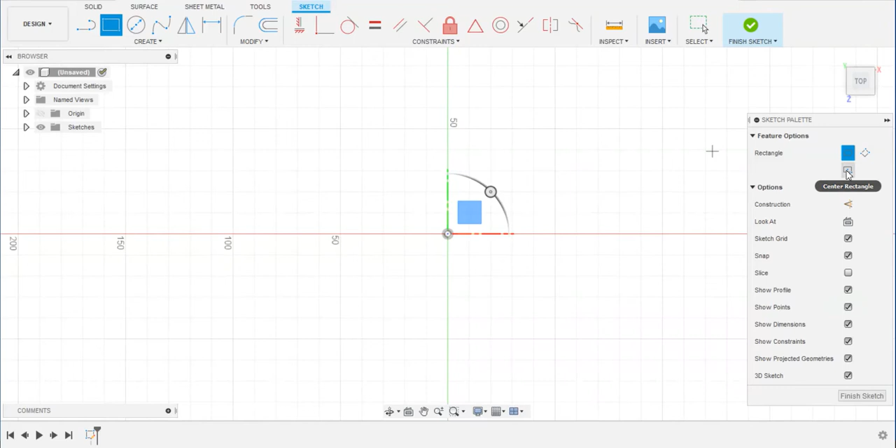As you have seen in the thumbnail, I am going to create a small bottle of glass material. For that, I am going to create a sketch of a rectangle. By selecting this center rectangle, I'm going to create a 100 into 100 square, and using this extrude command, I'm going to extrude it to 100 so that I can get a proper cube.

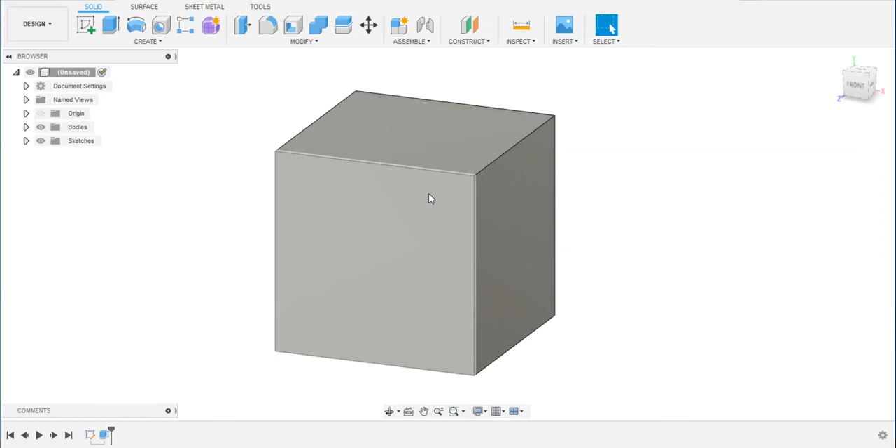And I'm going to create another cube using this free form so that I can remove the inner part and create the bottle. So for that I'm going to use this free form to create this box at the bottom part.

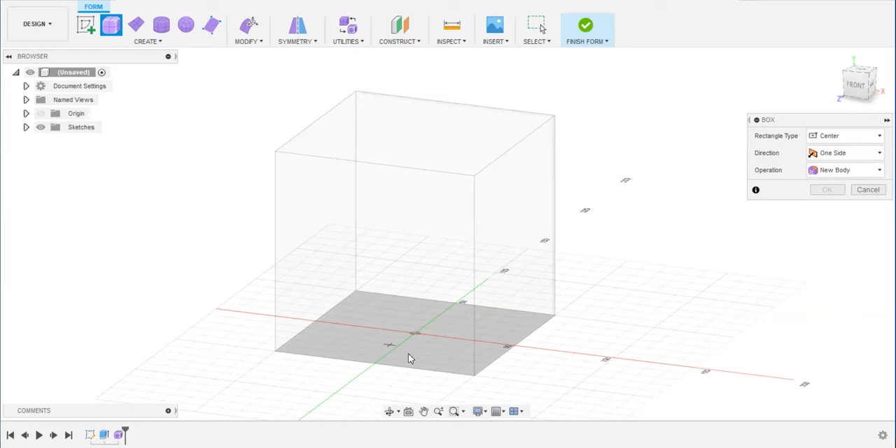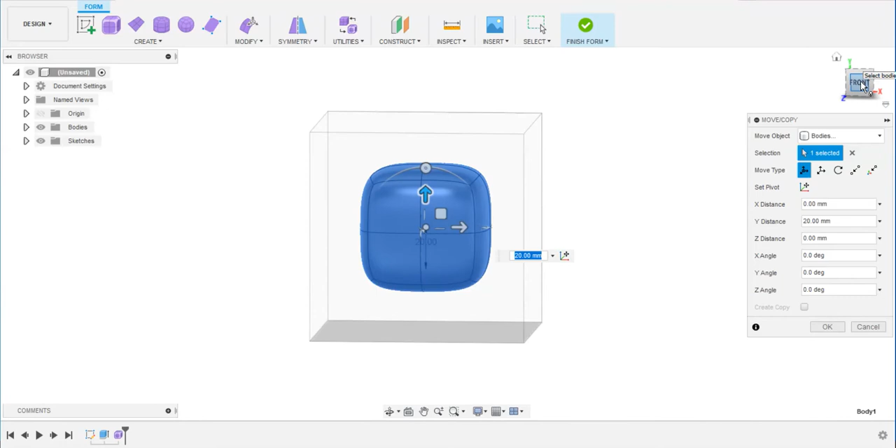Click on the bottom plane and create a box like this and make it a square like this. Click OK, and pressing left click 2 times on this box, use right click and click on move so that I can make it as a center.

After creating this, I'm going to create a spline between this inner part so that I can cut the inner part, but before this I'm going to apply material onto the cube so that I can make it a transparent material.

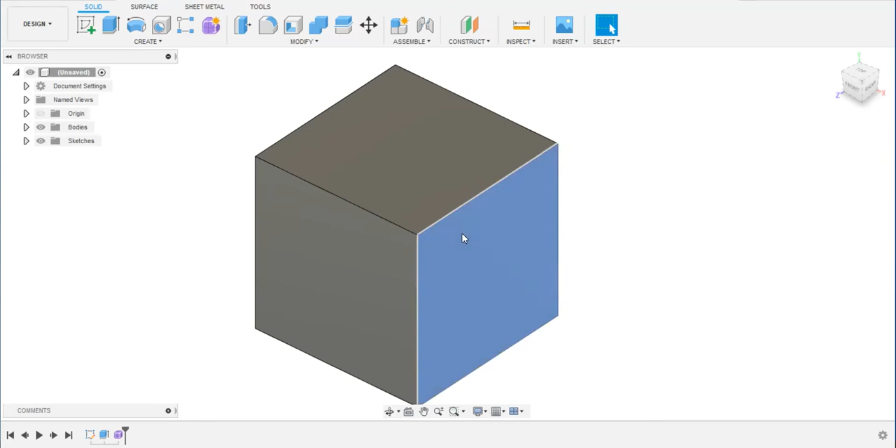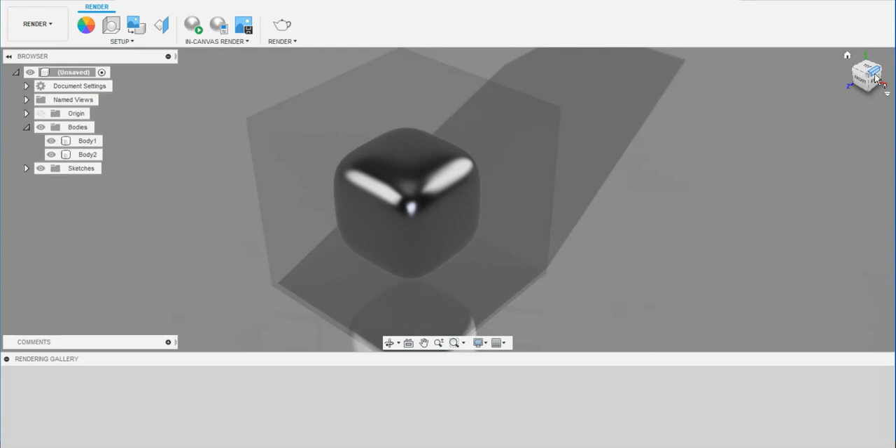Going to the body, here in the body I have two bodies, one is inner part, one is outer part. By clicking on this body, click right button and choose physical material. After using this physical material, I'm going to apply glass on this. You can also see in the render panel we have applied glass on this cube.

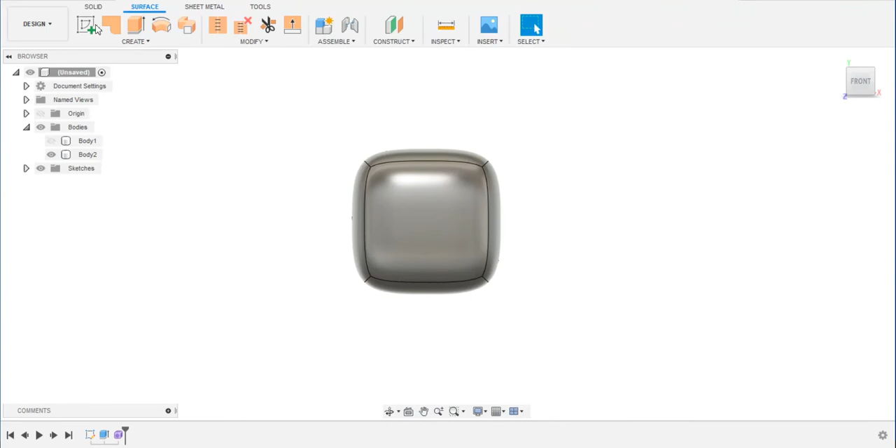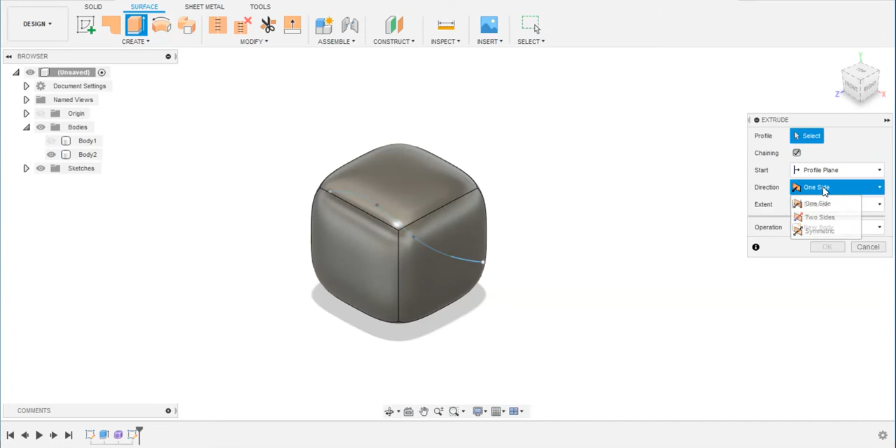So come into the design again, and we have to cut this inner body. First I have to disable the outer body. Click here, go to surface, click on sketch, use this center and use the spline like this, and use this extrude command for the patch for this surface modeling here. Select this profile, click on symmetric, and use this to extrude it.

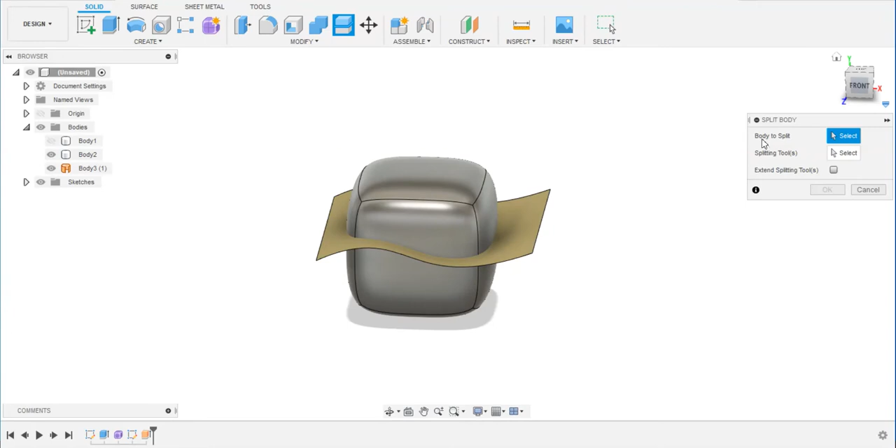Going to the solid again, I'm going to split body, using this as a split tool. Click to this split body. Body to split means I'm going to split this body, and as a splitting tool I'm going to use this split tool to split this body. Click OK, and now I get this body 2, and this is my body 3.

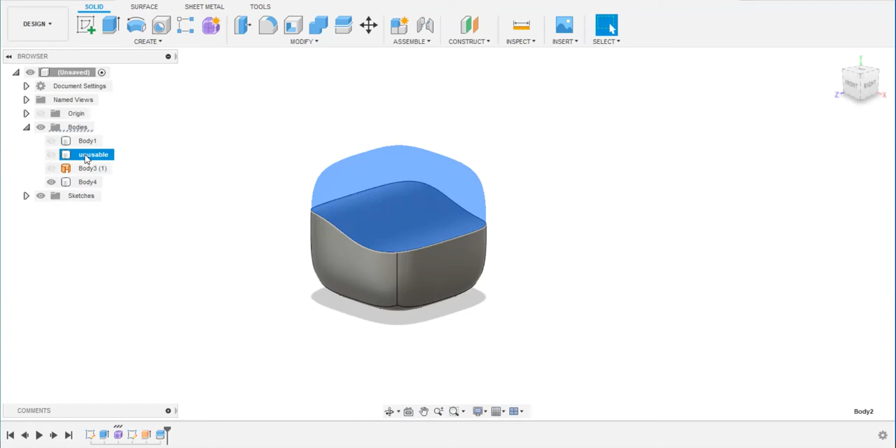So body 2 is unusable, and also body 3 is unusable. Okay, so we are going to work only with body 1 and body 4.

Also you can see by using this section analysis, by selecting any plane where you want to section, see the inner part of the body. This is used to create components or bodies inside the component or body.

For example, if I want to create the bottle for this water here, I am going to use this. First cancel it and name this body as box, and name this body as water.

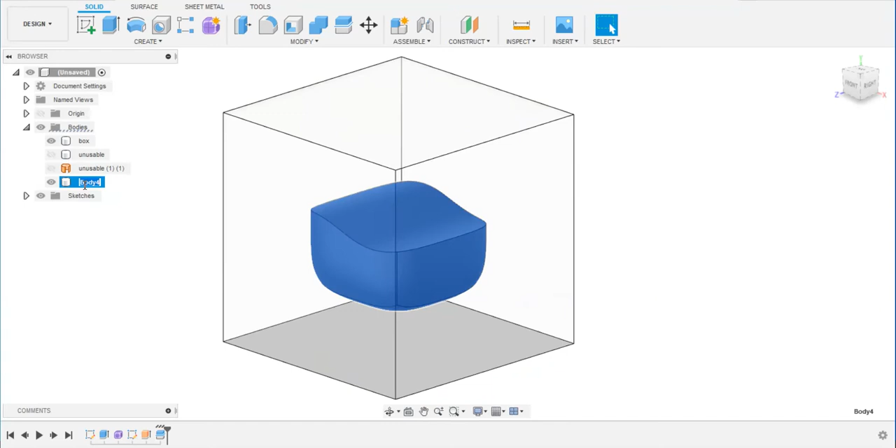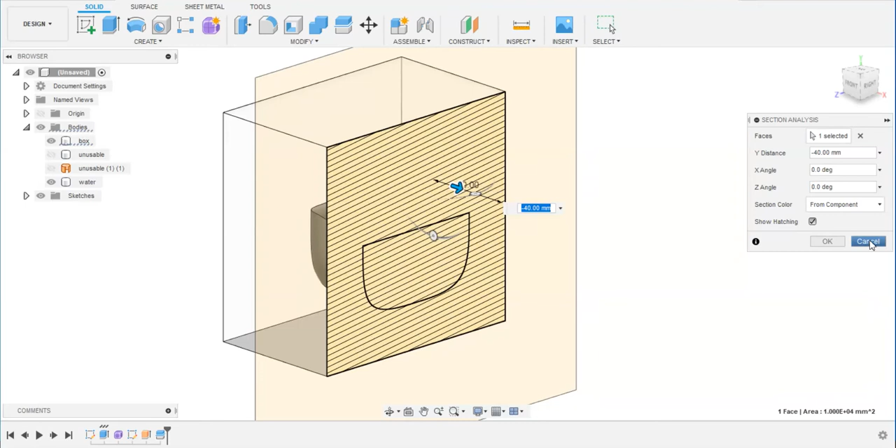Okay, now if I use this section analysis again, I can see this is my inner body. But the thing is, we haven't removed the inner area of this, so I'm going to use this unused, both this water and this unusable body, to remove some part of the cube from the inner area.

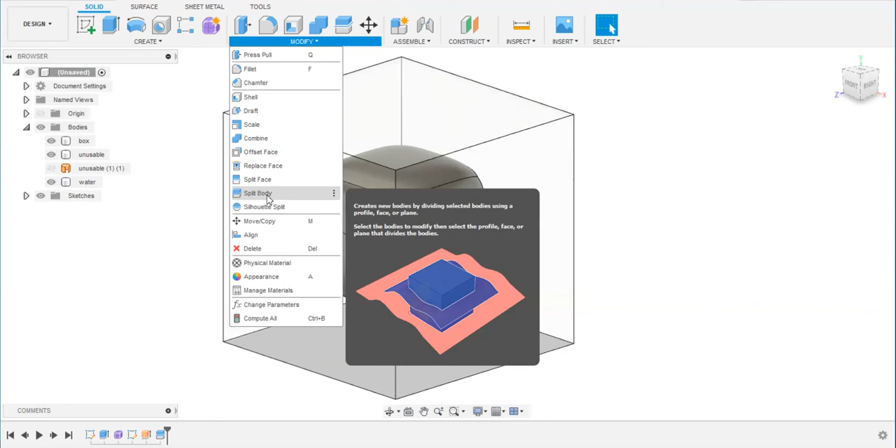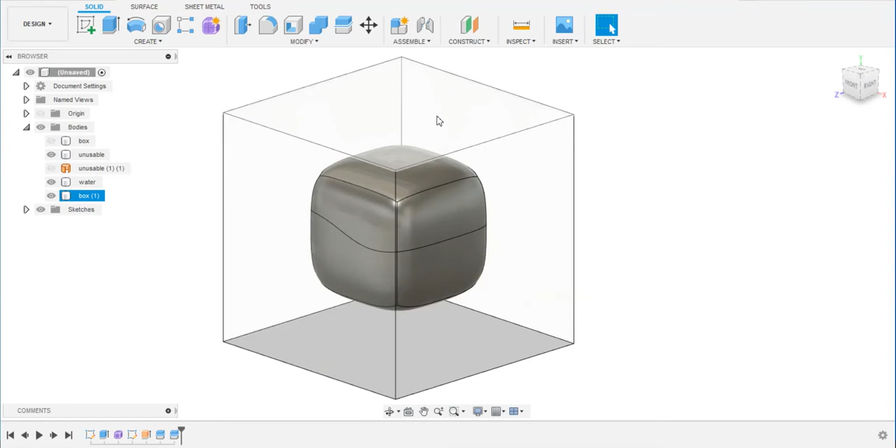So to split body, I'm going to use this body to split, and I'm going to use this as a split tool. Click OK, and you can see now this is the water, it is at the bottom, and this is the box, and this is also a box which we don't want. So this is how we can use this.

Now we can go to the section analysis again. If I see there is some hole, and this is our water. I can make more videos on this topic.

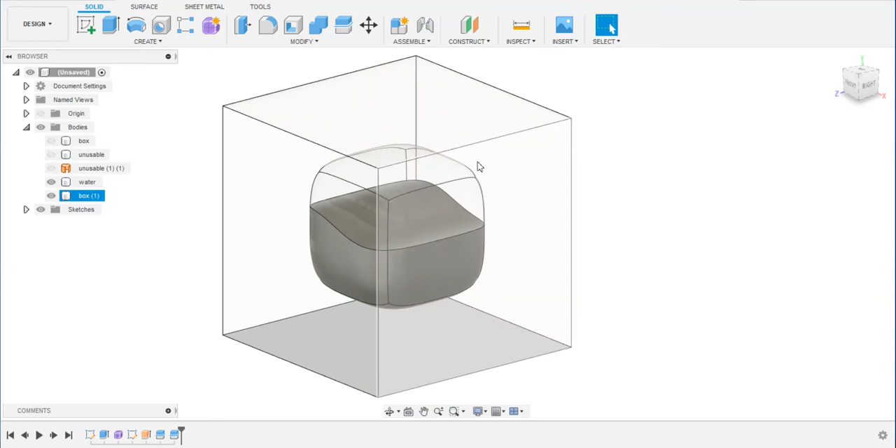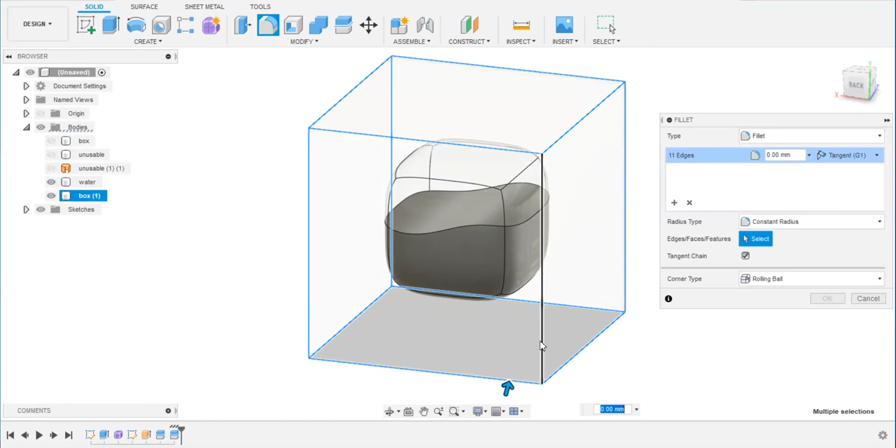But now I'm going to create this as a perfect bottle. So I'm going to select each and every edge of this cube so that I can create a fillet command. Using this, I'm going to use the fillet command over this.

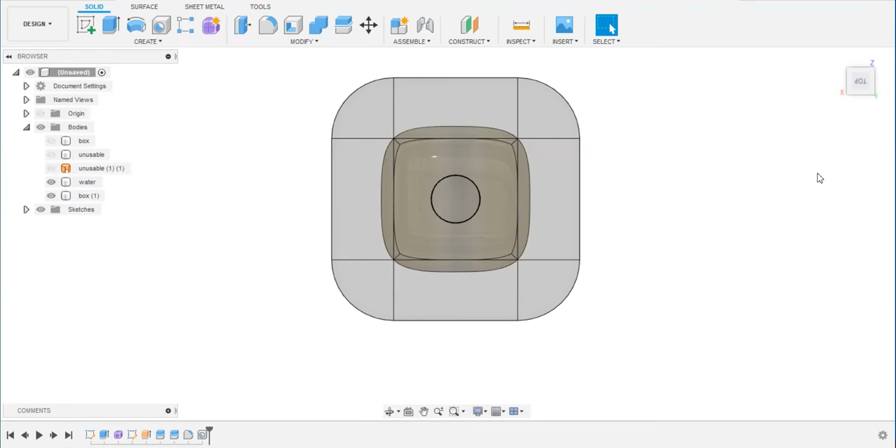Okay, done with this. Now I'm going to create a hole over this surface. This is at the bottom, which is good for us. If you want to make it anywhere on the face, you can drag it, and we have created a hole.

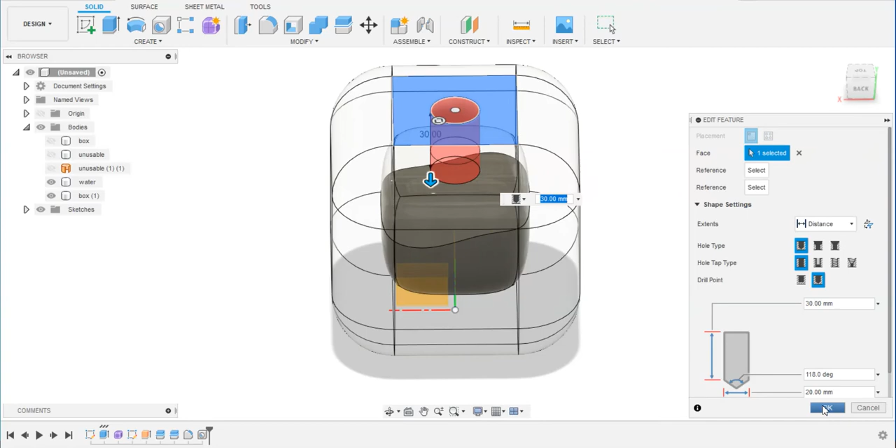But we need to extrude this hole more, because this hole is touching the inner area before reaching the bottom. So we are going to edit the feature and drag it down to get it larger.

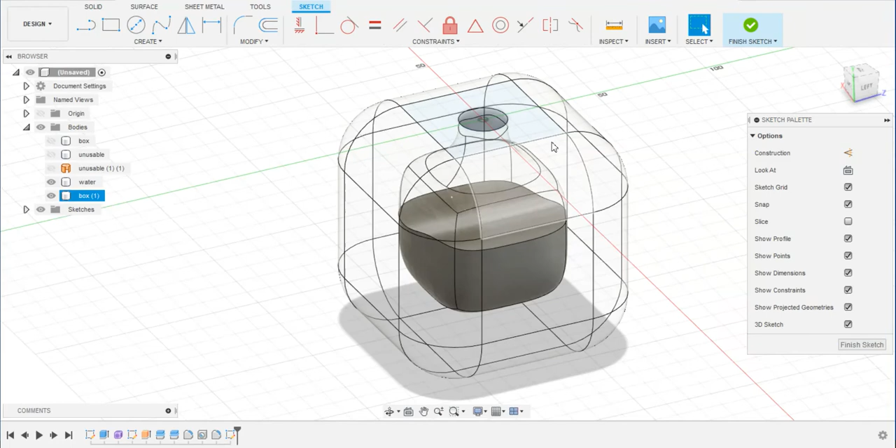Now use this fillet at the inside of this, so that we can get more smoothness. And also we are going to create a sketch over this, so that we can create a body over this.

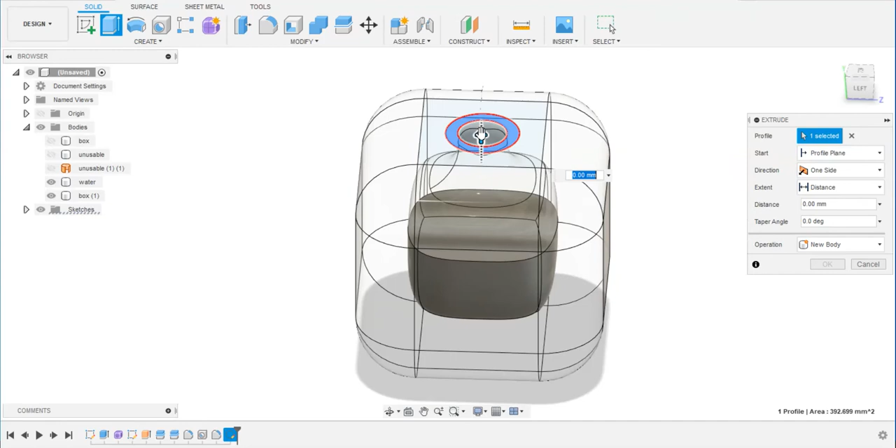Like for example, if you want to create a cap on this, we can create a cap. I'm going to use it as 30. Click OK, and use this extrude command to extrude it a little bit like this. I'm going to extrude it to 20 only, and using this thread, I can make thread over it.

But I don't want to make thread over this, because I'm going to create only a simple cap over this. So this is how we can create it till now.

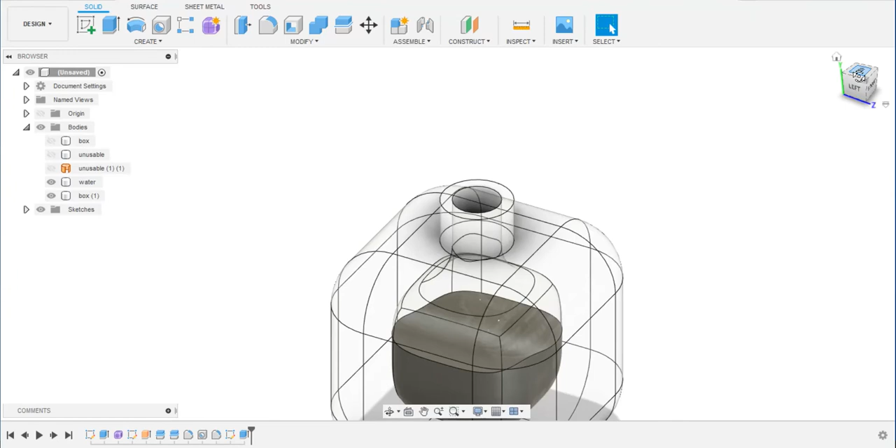And in this, I'm going to create a cap. So for that, I'm going to select this upper area and use this sketch command again to create a cap on this.

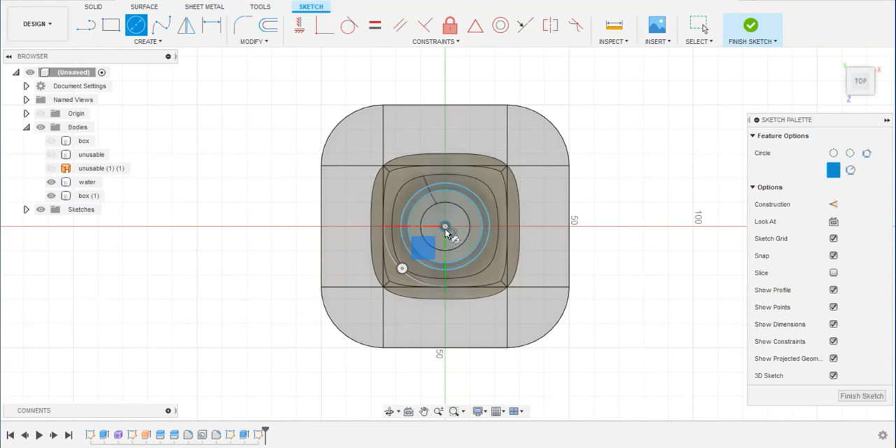I'm going to create a cap from here to here, here, and also here. Click OK.

Use this extrude command for the outer area, for the two sides, because we also want this area a little bit up, but not like this. I'm going to create it as a 4. Yes, that is correct. Going to create a new body.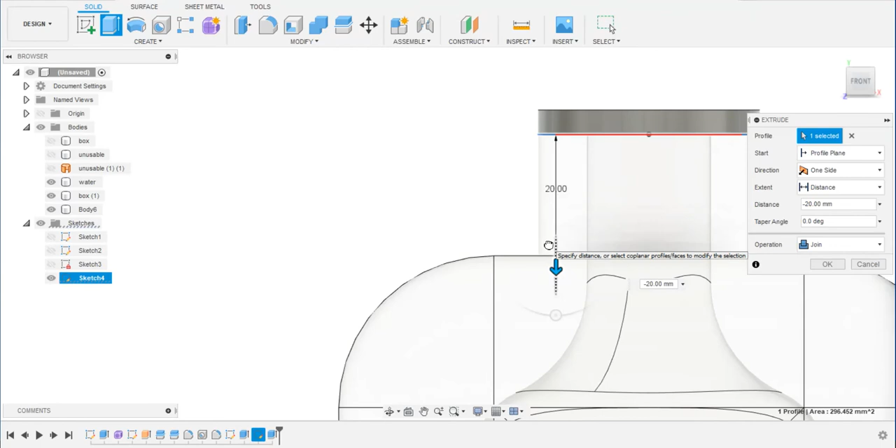This is not working. Going to select one surface again, use this till here, but I don't want to make this. I want this to here, and use this to join to this body, and I want this box hidden for this time right now.

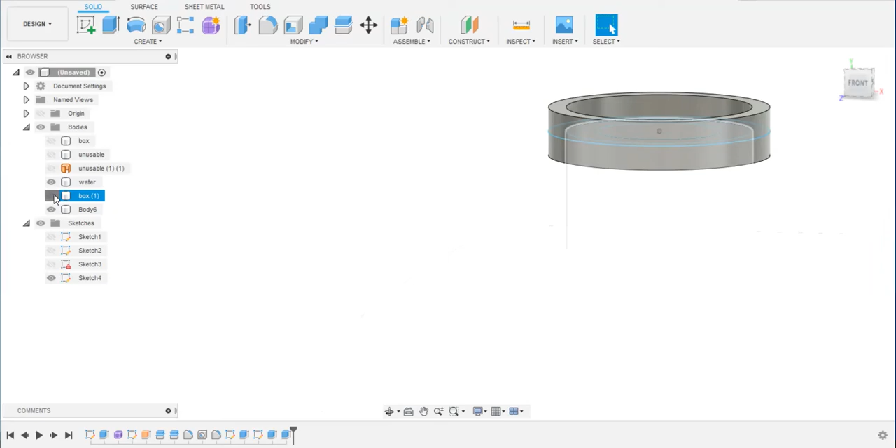Click OK. Make this box shown to us, and again use this part and this part extrudable.

Like this. Make this box hidden for some time, and we have created this.

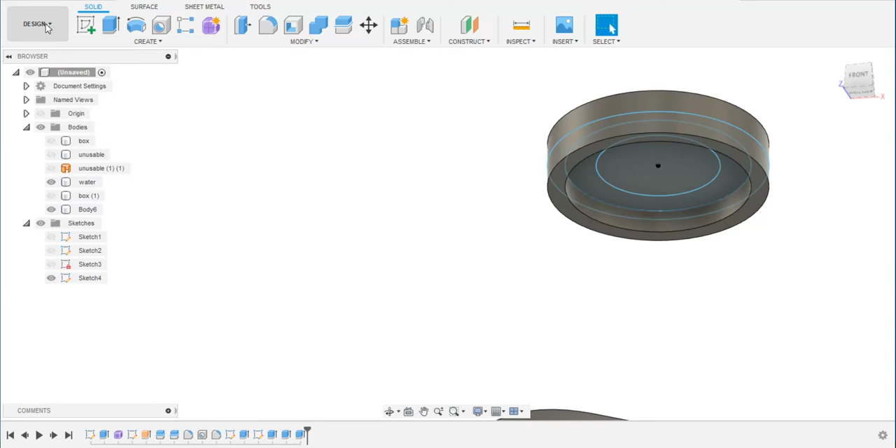And now I need to create a cap, the inner part of the cap. So I'm going to make it like this. I can see it by using this.

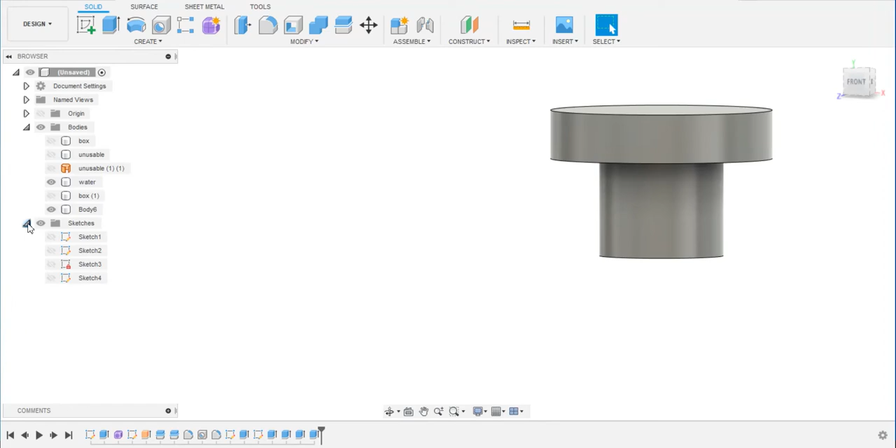Good, well, we have done with this. Click on join, and using this sketch, we can hide our sketch, and using this fillet command we are going to fillet it down a little bit, like this, which is looking good. And also we are going to make a fillet in this.

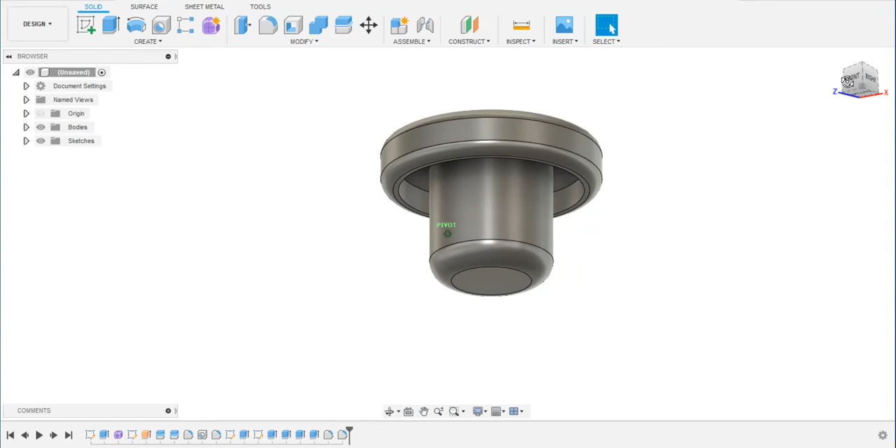Okay, now we are going to apply material on this. So this is our body, which is to be renamed as cap, and in this I'm going to apply a physical material which should be wood.

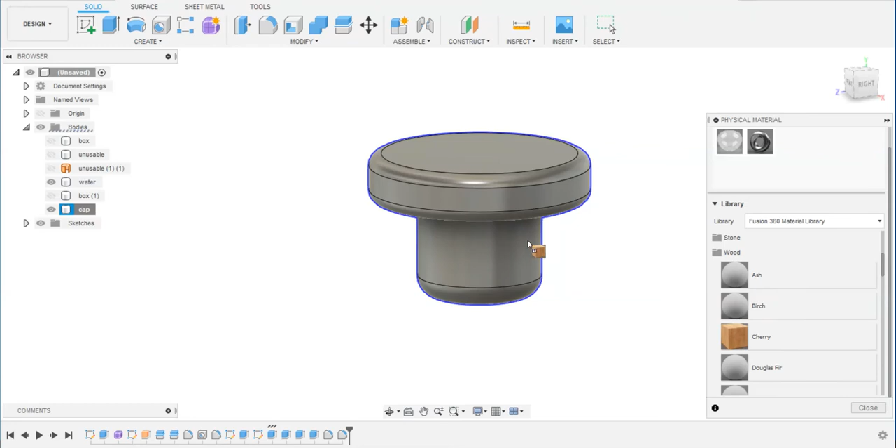Wood means this. Okay, now close and make this box open, and I'm going to apply a physical material also onto the water. So use this physical material again, and apply water to the physical material.

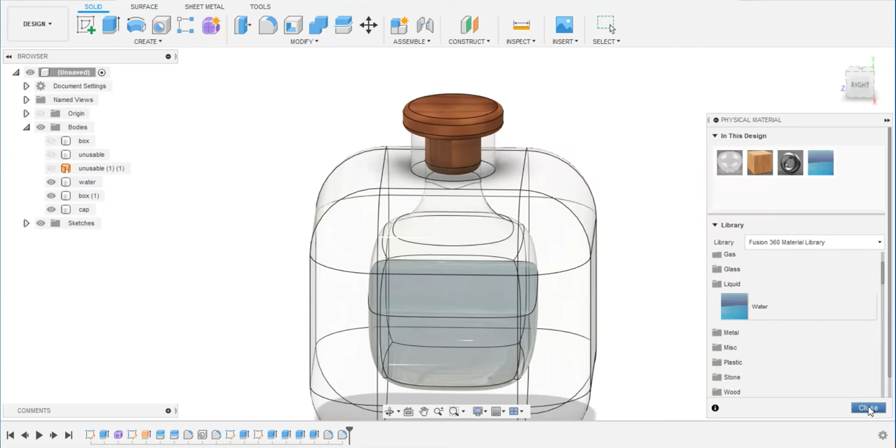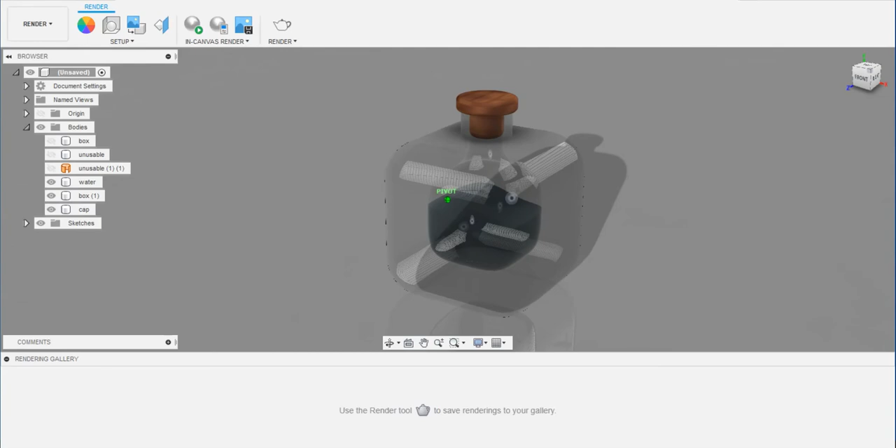Okay, close. Now if I go to the render panel, I can see my bottle clear with the water. This is how we can create a bottle inside Fusion 360.

I hope you have cleared your doubts with some features inside Fusion 360. In the next video I'm going to make bubbles inside this water.

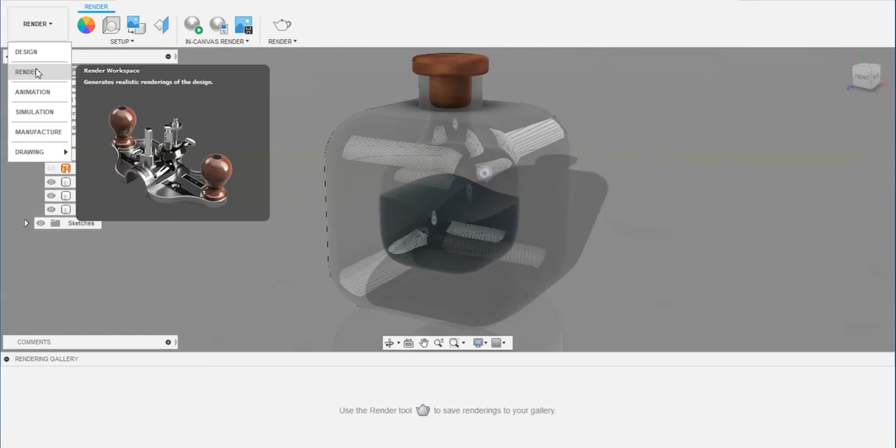For this I'm going to render. We need to save it first, and after that we can render only. So I'm going to save it as glass bottle.

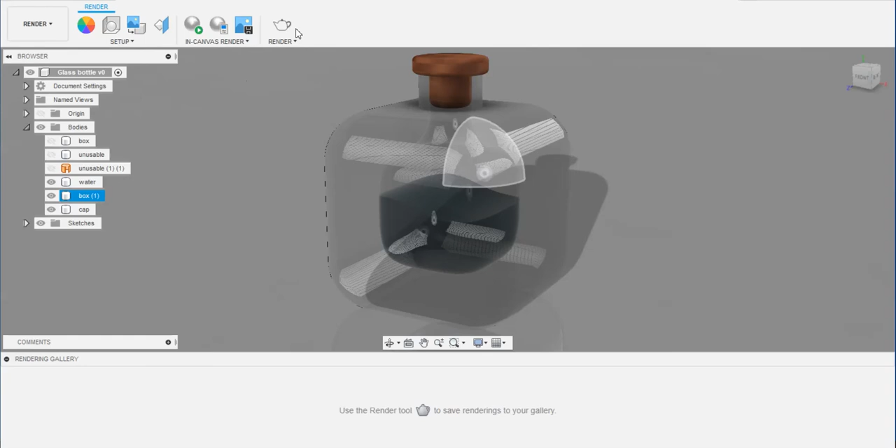Okay, it is saved. If I click on render, I have to go to custom, and using this custom I am going to use 1920x1080. You can also use this student education license from Autodesk Fusion 360, given for free for 3 years, and there is final, and click on render.

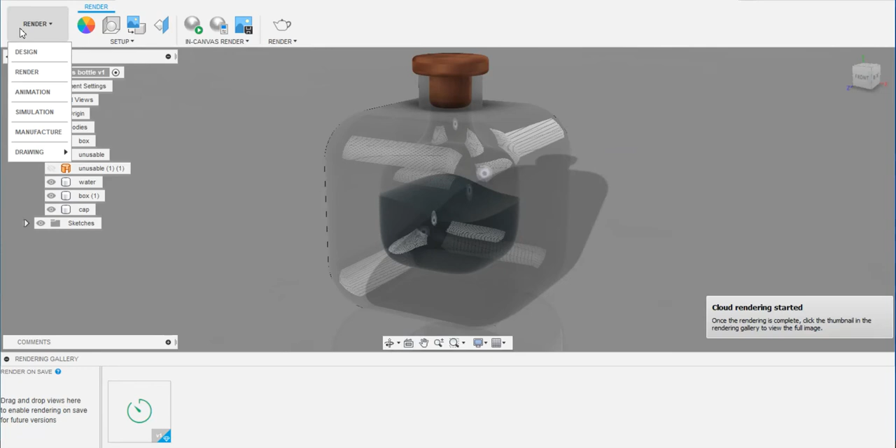Rendering is started, and I'm going to click on design again. Now you can see this part is movable because this is a cap, and all these separate bodies are movable.

You can use this by pressing left click 2 times onto any part, or use the right button to use move and copy. By clicking onto this, you can move your sketch anywhere in the scene.

So rendering is going on. After rendering is finished, I will resume it.

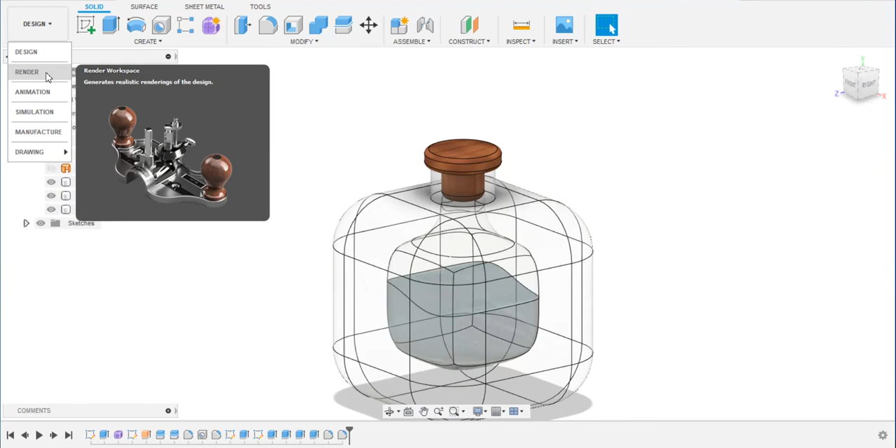So my rendering is finished, and you can see here - if you render anything into the scene, your rendering will be stored here, and this is my rendered image. You can see that it is very clear.

And you can also use exposure to make some changes inside this, and this is looking perfect for the scene. But it is still not looking good for me, because of some error in the rendering.

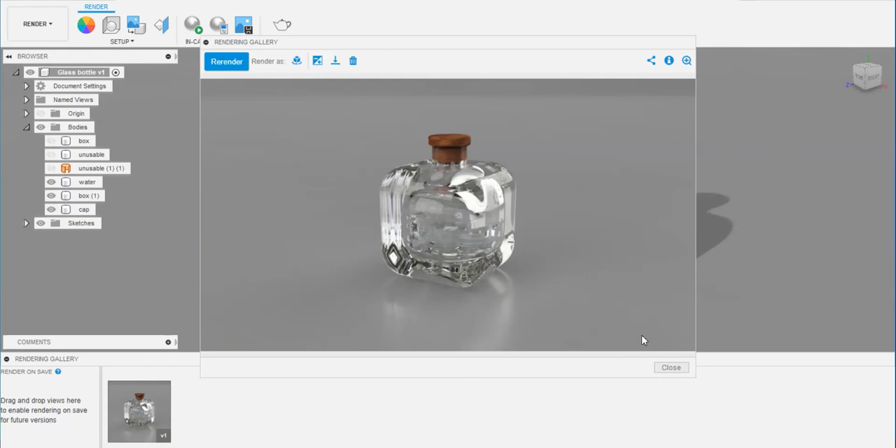And you can try from your own, so that you can get a clear render. In this you can see I cannot see the clear view of the inner part of this bottle. So I'm going to make this a good viewable area.

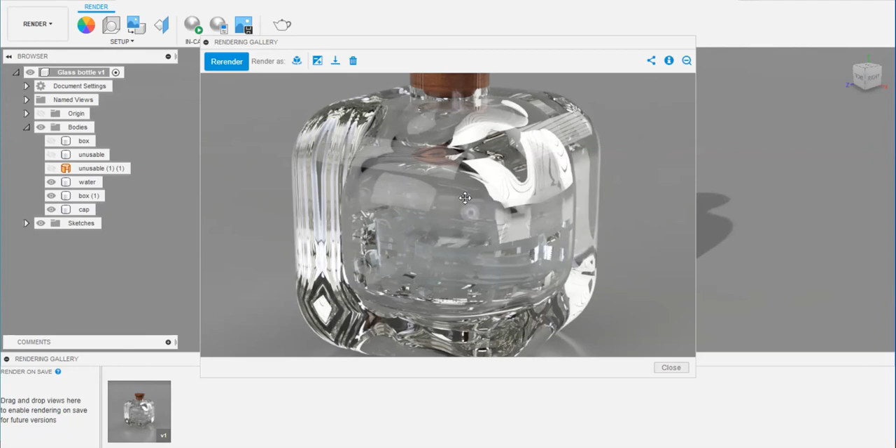Okay, and for this design, going to the design, you can also delete some parts, like this is an unusable part, you can delete it if you don't want this. I think if I delete this, I will also delete another part of it.

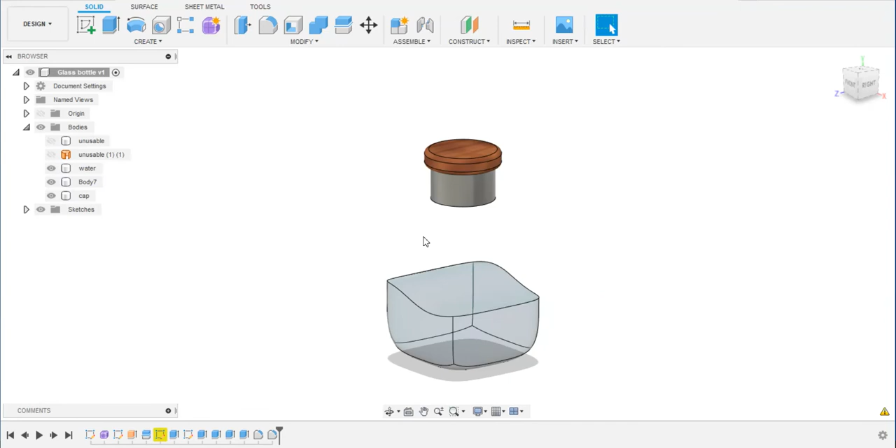But some parts you can delete, like this box I can delete. I think no, we cannot delete this box.

So the object you want to see in the viewport, you can hide, you can show, you can use this eye button here to show them in the viewport. And those you don't want to show in the viewport, you can hide them.

However, I cannot delete this, I don't know why. I think the object is linked with another one, so if I delete one, it will also delete the other part of it. But if there is a single entity, a single component inside this bottle which is not related to this portal, we can delete those objects.